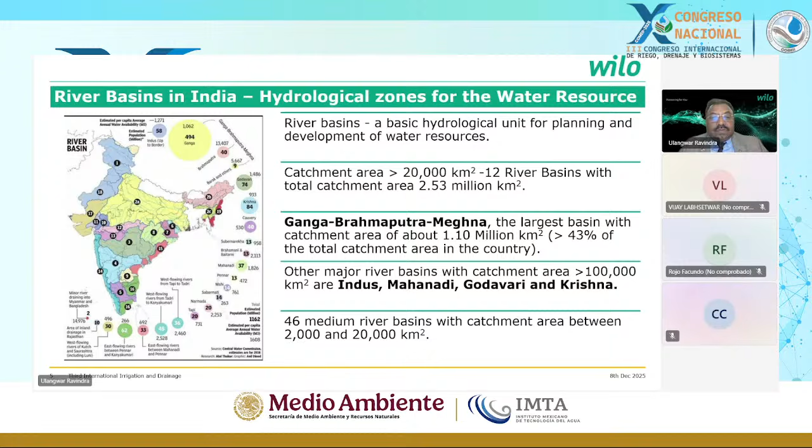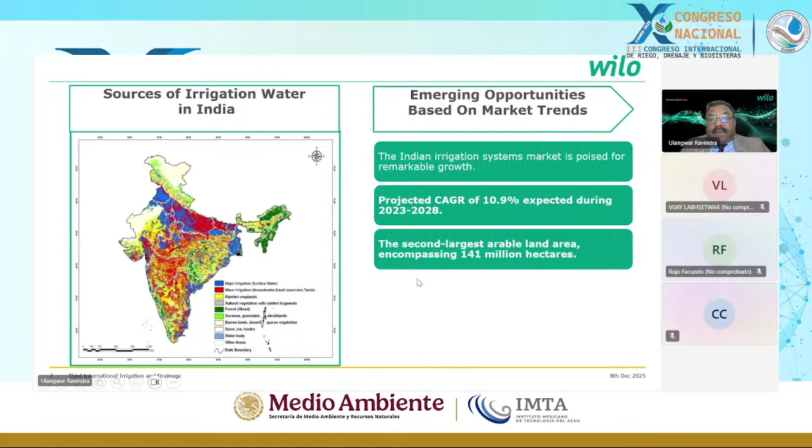But at the same time, there are a lot of emerging opportunities in India based on the recent trend. The Indian irrigation system market is poised for remarkable growth because we have 1.4 billion people to feed. At the same time, the Indian economy is totally based on agriculture. We are an agro economy, mainly similar to Mexico.

The projected CAGR, the compounded annual growth rate, is close to 11% during the period 2023 to 2028. India has one of the second largest arable land areas, encompassing 141 million hectares, and out of which the irrigated crop area is almost 50%, which is 71 million hectares.

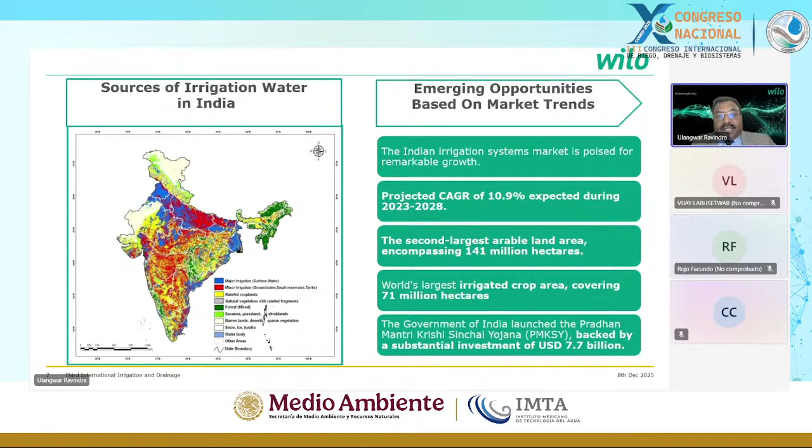In India, the irrigation sector is governed by many government policies from the federal government as well as from the state government. There are many programs driving this irrigation sector, with all the funds and finance coming from the government. So all the big programs currently implemented in India are backed by government funding. There is one program, a Prime Minister program, worth US $7.7 billion, one of the flagship programs of the present government. So there is a huge push from the government to develop the irrigation infrastructure in the country.

In India, we divide irrigation projects into small irrigation - any project less than 500 hectares is called small irrigation. Medium irrigation projects are between 500 hectares to 2,000 hectares, and major irrigation projects are close to 10,000 hectares - any project more than 10,000 hectares is called a major irrigation project. Most projects are classified as small, medium, or major based on the command area, which is defined in hectares.

Recently in the country we have a trend, and also a government policy, which we call a pressurized distribution network. During the opening session we mentioned that in Mexico also there are a lot of canal-based projects. Similarly, now the pressurized distribution network takes water from the resource to the root of the crop or to the boundary of the farmland through a network of pipelines. This is pressurized water because there is a pumping system, and through pumping we develop enough pressure at the farm boundary, and this is also called ready for micro irrigation.

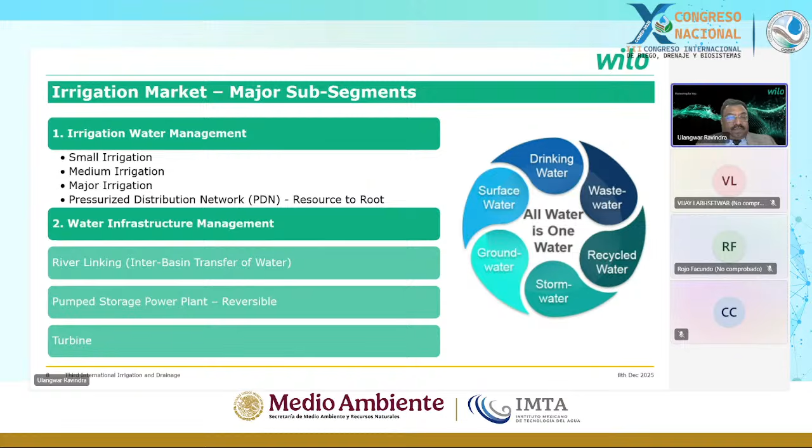We have two sources, groundwater based - normally these are open wells and also bore wells. I think it's a similar situation in Mexico also, because groundwater is being overexploited and the water level is speedily decreasing, so we need higher capacity pumps to draw the water from this bore well from the depth of the earth.

We have surface water based sources - mainly all the big projects which we call community irrigation projects are based on surface water, and the source of this water is either lakes, dams, canals, or rivers. So India during the last 75 years has built many dams, and almost all the potential where we can build a dam has been harnessed by the central federal government.

Mainly this is a state government subject. All the states have developed dams, and these dams are the primary source of irrigation and also for drinking water for communities in the rural part of the country.

This dam also has its own canal network. At the same time, many rivers are perennial rivers, large rivers which we saw in the beginning in the river basin. These perennial rivers flow all 12 months and are also a source of irrigation, because many large projects are built on rivers. One of the case studies I am going to present is also a river-based, large community-based project.

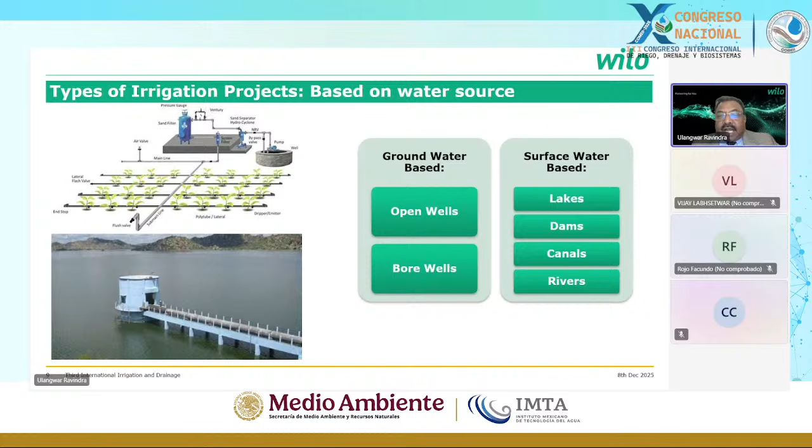In surface water, there are two types. Initially, when India became independent, we started with gravity irrigation. And once the gravity irrigation covered the entire command area, the second phase came with lift irrigation.

In the picture, you can see in a large river they have built a pump house with a battery of pumps installed. These pumps lift water from the river, and you can see the rising main, the pipeline. They lift water and take it to a higher elevation where the command area is, which normally cannot be served by gravity. So you need to lift the water from one level to another, with a series of pumping, sometimes single stage, sometimes two stage.

This is a project I was also involved in, one of the big projects in central India, on the river called Krishna. One of the largest pump houses, when it was constructed 20 years back, was one of the largest pump houses in Asia, I would say. So we have either single-stage pumping or multi-stage pumping.

We call it series pumping. If the command area is at a very high elevation, we take water from one pumping station to pumping station 2, then 3 and 4. Depending on how the command area is distributed at different levels, water is transferred from one place to another with the help of pumps in large pumping stations.

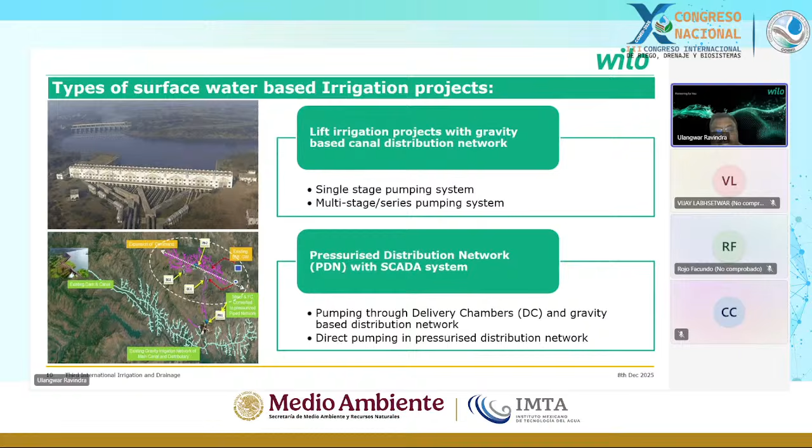Just to give you an idea how big the Indian market is: we have 141 million hectares of net cultivatable area, out of which the irrigated area is 71 million hectares. Mexico has 6.5 million hectares of irrigated land, as far as I know. So we are 10 times bigger than Mexico as far as net irrigated area is concerned.

And again, it is distributed by groundwater. So almost 43 million hectare is groundwater, and only 28% is covered under micro irrigation. Out of 43 million hectare, 12 million hectare is covered under micro irrigation, and surface water is 28 million hectare, and the micro irrigation coverage is very minimal. Actually, it is negligible because this big groundwater based schemes are all government finance, whereas surface

water is now just starting in a big way. So slowly farmers, once the water is available at a farm boundary, will adopt sprinkler or drip irrigation.

So we have the program called 'per drop more crop.' That is the motto or tagline of the government program, where they want to harness every drop to generate or grow more crop. So it is called more per drop, more crop.

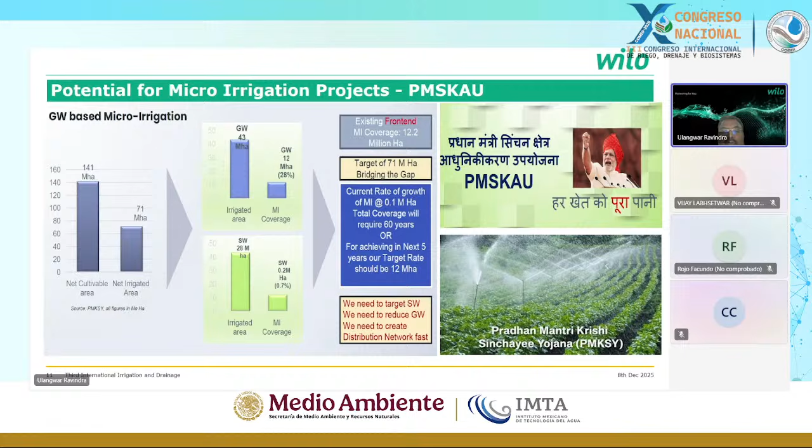Now, as I mentioned, India is shifting from a canal-based system to the pipe-based system, which according to me is a big revolution in improving water efficiency, which all of you as irrigation engineers also agree, because here there's no wastage of water.

And the biggest problem in India is if you have to put the canal, we have to acquire the land from the farmer, which is on a permanent basis, and which is a big painful process, and it takes a long time to get the land from the farmer to lay the canal.

And this is one of the reasons many irrigation schemes were not so effective, because they could not develop the complete canal network covering the whole command area. There were some gaps, and the water could not reach the tail end. So the farmers at the tail end were suffering.

That is why now, as per government policy, any irrigation project in India has to be through pipe network. We cannot have a new project with a canal.

There are many advantages through pipe: no wastage of water, no theft, no evaporation, and there is equitable distribution because every farmer up to the tail end can get water, better control and management, no contamination. You can open it as per the irrigation calendar. There's no maintenance - canal has huge maintenance and silting issues.

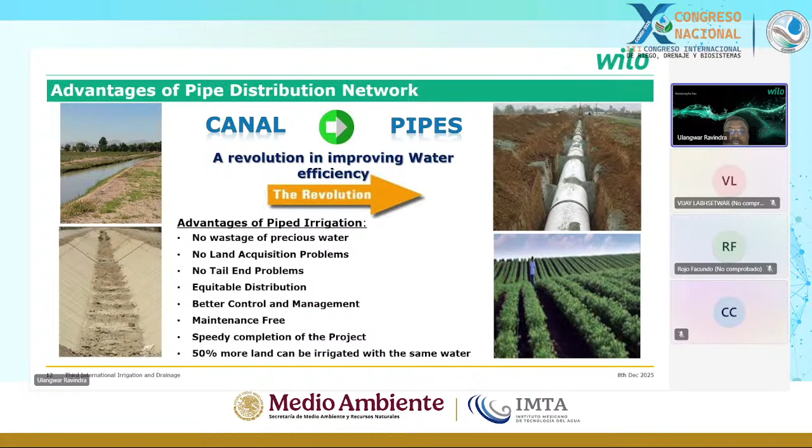So this is now government policy in India - all projects should be with pipe irrigation.

Okay, I think I'll run a little bit fast. Smart - so we call it, when it is pipe irrigation, it is smart irrigation because those are with a pumping and a SCADA system.

So we know the benefit of smart irrigation, you all are experts, so you know. But just to touch upon, basically, it is helping farmers to generate more income because of higher water use efficiency and agriculture productivity.

The yield of the crop has gone up very substantially, which is generating substantial employment in rural areas. Earlier, many people from rural areas used to take one crop during the rainy season, and later they used to migrate to big cities for earning money, because there is no water after the rain, so they don't have any work, so they go to the city, and then the city becomes crowded, with a lot of urbanization and associated problems.

So because now water is available in the farm for the second and third season, there is reverse migration - we call it reverse migration. Now these people from rural areas are not going to cities, and they are busy with their own farm, which is bringing a lot of social benefit, bringing happiness - community and family life has gone up, a lot of social issues are resolved.

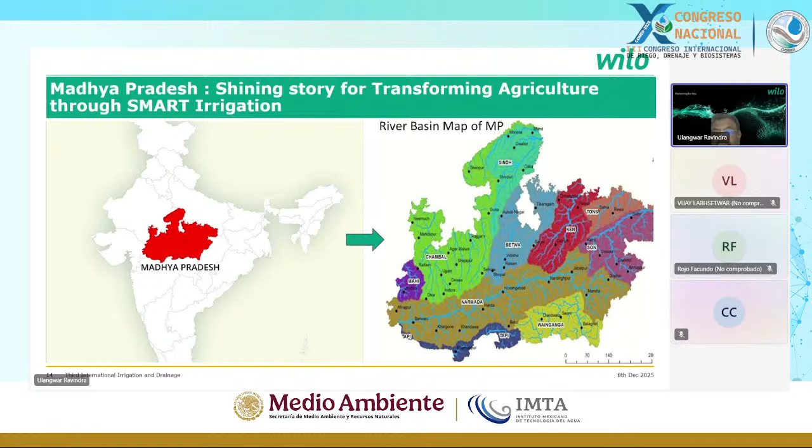So far, the government did not do anything, but suddenly they realized if they don't use the water, they will lose their control or rights on it. So they came out with many projects, but the problem is this river flows at a very low elevation, while all the command area is at a higher elevation. So to use this water, they have to put big pumping stations to lift the water from the river and take it to the higher elevation.

Because of all this investment in irrigation projects by the state government, you can see the progress in agriculture development. We call it transforming agriculture through irrigation. The state's GDP was growing at 4.5%, and now they are growing at 16.5%, one of the highest in the country. This state has the highest growth area, driven not by industry, but by agriculture.

Agriculture growth was merely 0.3%, negligible in 2003. After 20 years, it is now 19%, very impressive. Per capita income has increased more than 10 times, from $125 to $1,600. Irrigation command area has increased from 0.7 million hectares to 4.5 million, growing very fast because of various schemes.

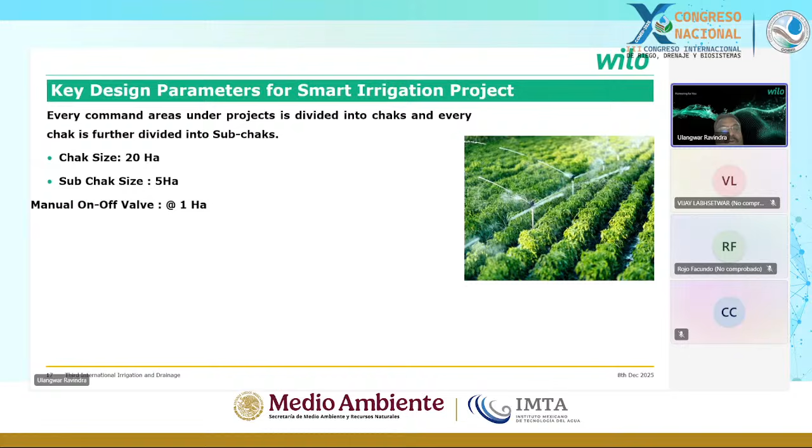I'll quickly take you through how these projects are designed. This is the interesting part. Every command area under a project is divided into a 'chak,' which is a unit normally 20 hectares in size. They combine the farms of every farmer to make this 20 hectare unit, called a chak in the local language. This is further subdivided into 4 zones, each zone being like a sub-chak of 5 hectares.

At a manual on-off valve, they put it at 1 hectare. So 20 hectares is divided into 4 zones of 5 hectares each, and every 5 hectares is divided into 5 outlets of 1 hectare.

The project is designed so that 20-meter pressure is available at the 1 hectare outlet, which is normally the farm outlet. Depending on soil condition, weather, and crop type, we call it a kharif crop, but normally it is wheat. This area is very popular for high quality wheat production.

The crop water requirement, or irrigation duty, is 0.33 liter per second, varying from 0.33 to 0.35 depending on which zone the project is located in the state. The complete pipeline is designed to deliver 10 times the irrigation duty, so when sizing the diameter, we take 10 times the duty. The pipeline is designed for 3.5 LPS per hectare.

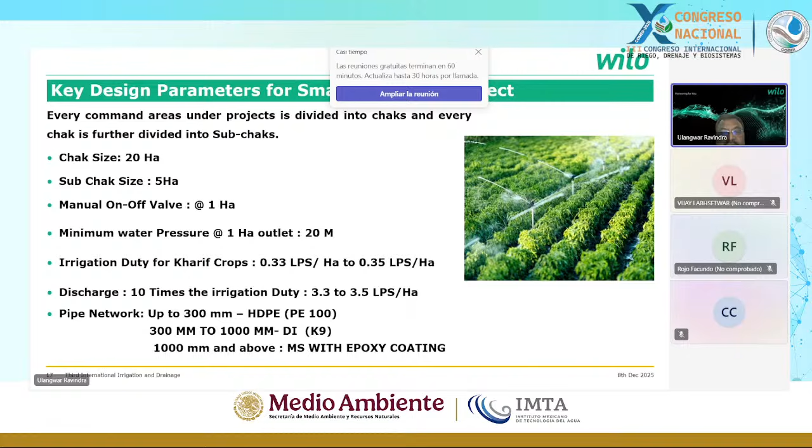All this pipeline is underground, and up to 300 mm diameter we use HDPE pipe, high density polyethylene, grade PE100. From 300 mm to 1000 mm we use ductile iron, K9 grade pressure grade. Above 1000 mm we use steel pipe with epoxy coating, which is food grade quality.

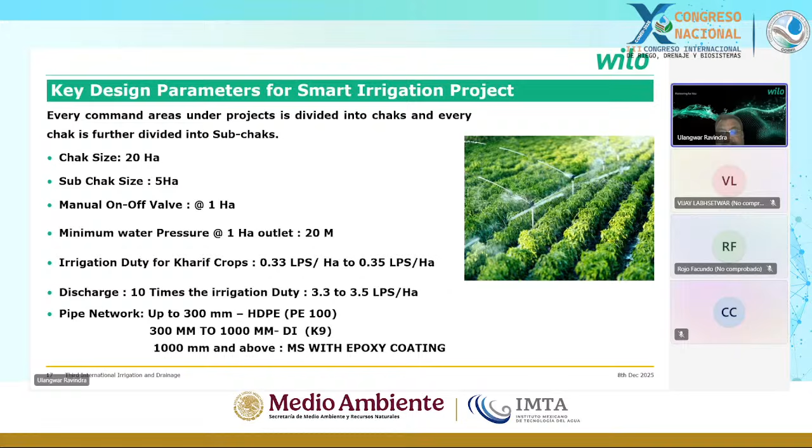This is how the distribution network works, as I told you. Suppose this is the river. From the river the water is taken, and this is the complete pipeline, the hydraulic network of the command area where we want to take the water.

For every project, government declares the command area, say 10,000 hectares or 20,000 hectares. We are working today on one project whose command area is 100,000 hectares, so you can understand how big the scheme is. Normally it's divided into many villages, and depending on the village we have the farm record, land record, which is the basis for designing this project.

Depending on the topography and elevation difference, the pipeline is designed using various hydraulic software like WaterGEMS or Autodesk, among many popular software in India. All this software is used for deciding the routing of the pipeline, the sizing and diameter, and how to reach every farm up to 1 hectare.

It's like a telescopic network of pipeline, bigger diameter at first, and as you go further away it goes on reducing, until at the last point it's normally 60 mm. Sometimes it's 3000 mm from the beginning, and at the tail end it goes down to 60 mm or 90 mm, depending on the total flow.

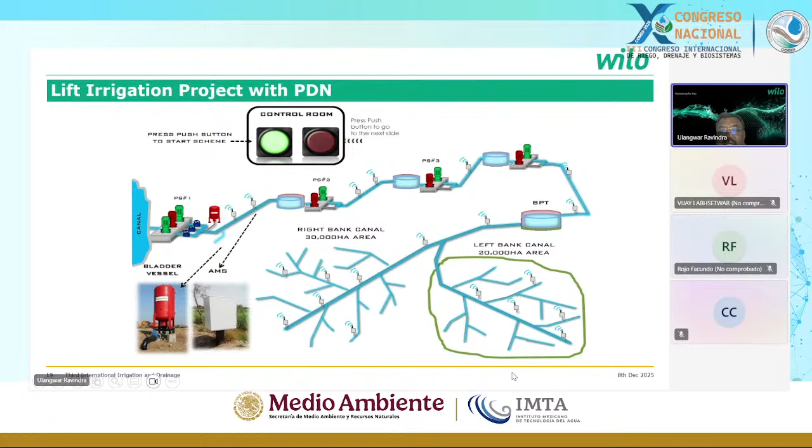This is also shown schematically. We have a pumping station at the beginning, then pipeline, and on the pipeline we have an air management system, because this pipeline is underground and needs proper venting. So air release valves, control valves, and isolation valves are provided.

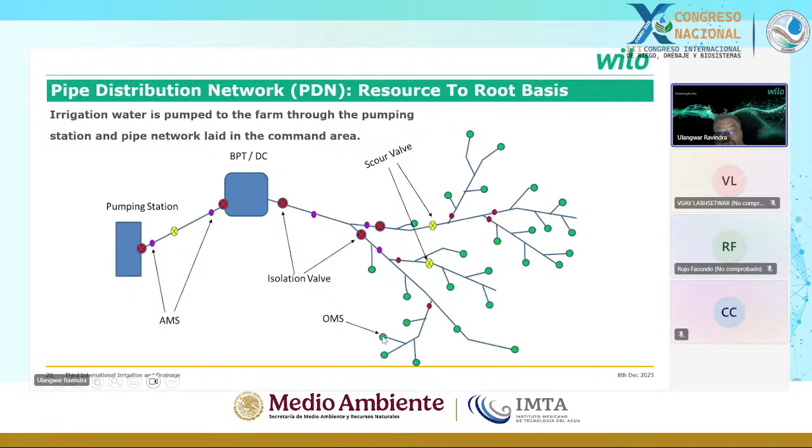At the end, at the 20 hectare point, there is the outlet management system, where the control valves are placed. Let me take you quickly through the control valve.

This is the control valve. This control valve is actually operated through hydraulic pressure of the pipeline, and there is solenoid operation, and we use solar energy for operation of solenoid valves.

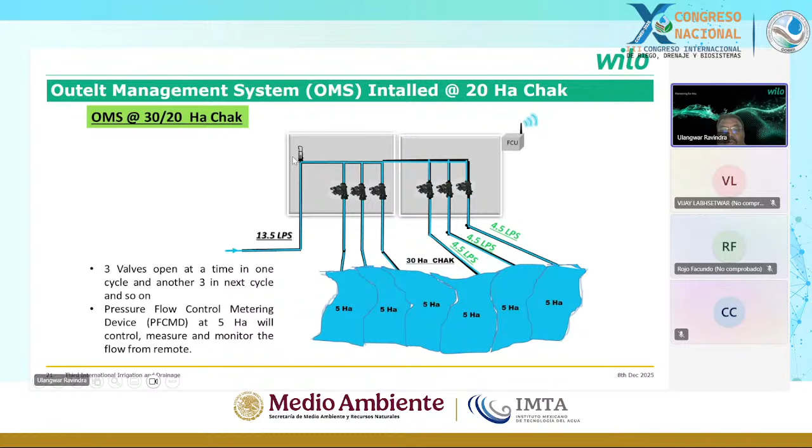So no pipeline is seen above the ground, everything is underground. Every time three valves are open as per the irrigation calendar or scheduling, and after this cycle is over, another three valves will get open. These are radio connected, so the valve can be operated remotely from a control station, mobile, or laptop anywhere in the world. There is a wireless communication system, very advanced, so every valve, every farm can be controlled remotely using the radio link.

So this is what it looks like. In the actual picture, you can see this water is coming from the ground, and there is an air valve and an isolation valve. Here there is again a filtration system. Because we want to use the water for sprinkler, it should be clean water, so we filter the water with 200 micron.

Here you can see the valves, and this is the box in which all the control circuit is mounted. There is a battery, and this battery is operated through a solar panel. So you don't need any electricity, and the valve also operates through the line pressure. So you don't require any electricity. It is an electricity-less and wireless system.

There is a web SCADA system, so that in a central control room in the pump house, all these kinds of boxes are connected, and you can run the program irrigation schedule depending on what is the crop and what is the season. The complete program can be fed into the computer, and the whole system will work automatically. The farmer will get a notification on his mobile whenever his turn comes; 10 minutes before the water is going to start, he gets an SMS on his mobile that his valve water is going to come.

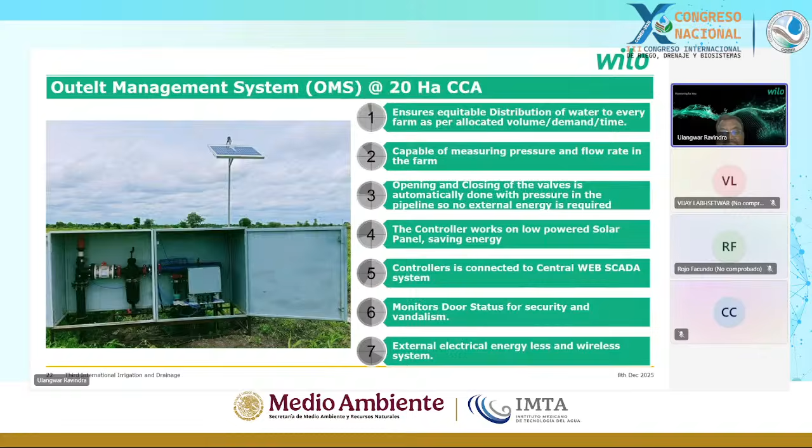So this is how the SCADA screen will look, where you can see the incoming pressure, the delta P, the outlet pressure. Valve open is green, valve close is red. You know which farm, where it is going, his mobile number, what is the area of a chak, and then all the position, how much valve is open, how much valve is closed, what is the water going, how much total volume delivered today. Everything is available at a quick click of a button.

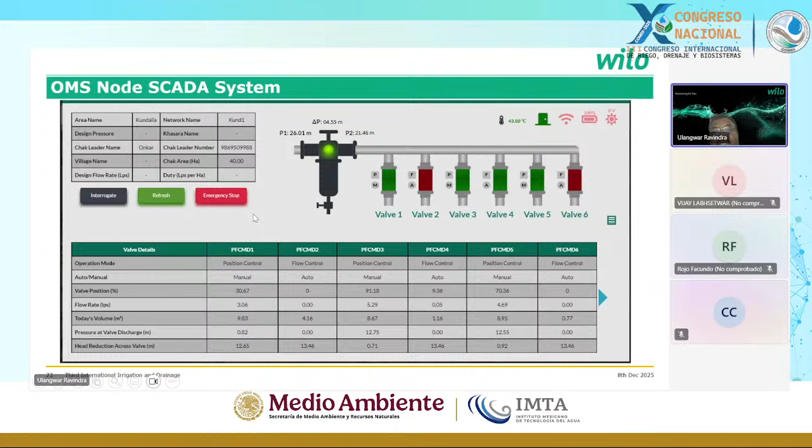So you can access this anywhere. You know the temperature, the battery life, the sunlight - everything is monitored remotely, how is the network. This is a very advanced SCADA system which monitors every node, which is installed at 20 hectares.

This is a central control station which has all the pumping system and SCADA system. You can operate the number of pumps depending on the water level and the complete irrigation demand in the command area. You can decide how many pumps to be operated. Then there is a VFD, so we can operate higher flow or lower flow. Also, the power is calculated, so energy efficiency is also taken into consideration. Every pumping station has very advanced instrumentation and control to operate a big pump.

These are very big pumps, 3 megawatt, 4 megawatt each. Normally each project consumes 50 to 60 megawatt of energy, so we have to be very mindful how we use less energy to pump more water.

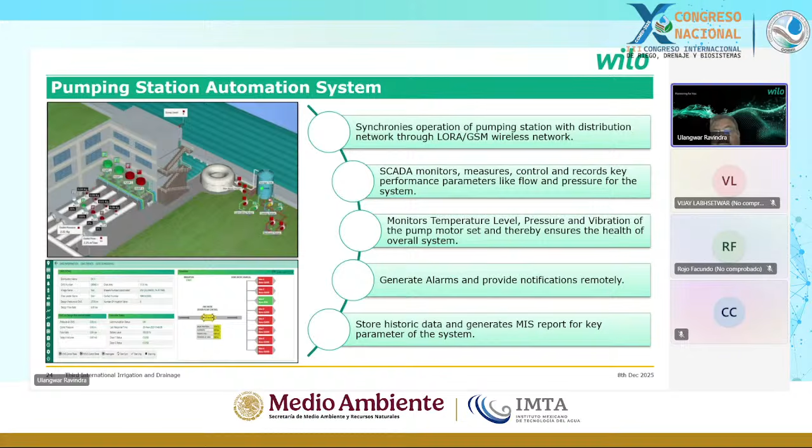So this is how we do the gateway. There is a radio, wireless radio network, covering the complete command area. We install towers like this - these are the wireless radio towers which control all such OMS installed in the nearby area. Depending on the topography, the height of the tower and the location of the tower, we decide. And there is a LoRaWAN.

These are different technologies. Sometimes we use GPRS, which is a mobile network; sometimes we use LoRaWAN, which is another wireless radio technology. All these towers are talking to the remote server, which can be anywhere in the world, and then it gets connected to the control room. So sitting in the control room, you can give a command to any outlet to close the valve, open the valve, based on what is the demand for water. If there is rainfall, we can close all the valves.

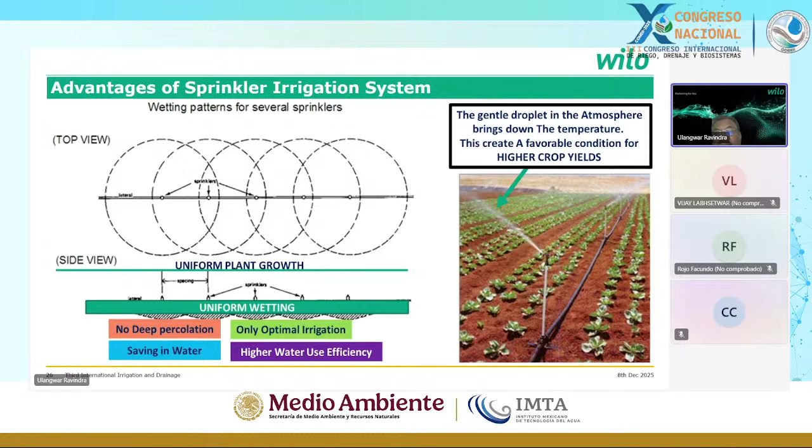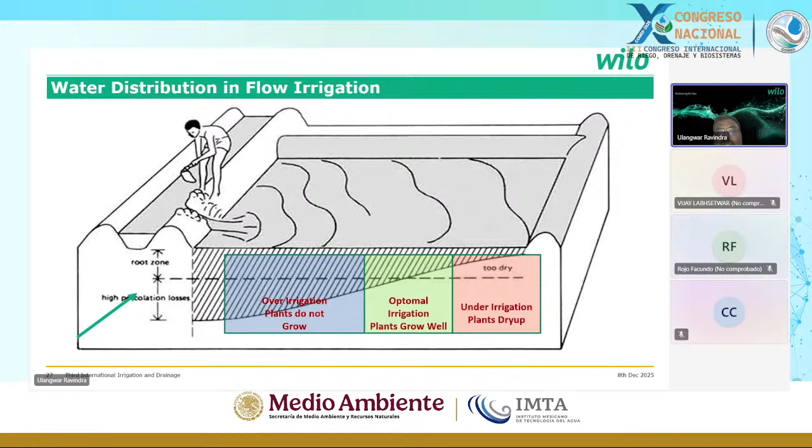Okay, I think you are more expert on this, so I will not talk more on the sprinkler irrigation. There are a lot of advantages of sprinkler irrigation because the field is evenly wetted, so uniform plant growth is possible. This is the earlier system of flow irrigation - I think I will not touch on that because you are all experts.

Okay, I will quickly take you through one of the projects. This is the Nagalwadi project. I think I'll finish in 5 minutes.

Here, the same Narmada River. This project is lifting 54,000 meter cube per hour. Total pipeline length is 60 kilometers. From here, water is lifted and we are bringing water to here. So this is 60 kilometers long. Total height is 293 meters. The total project cost is 110 million USD and 106 villages are getting benefited.

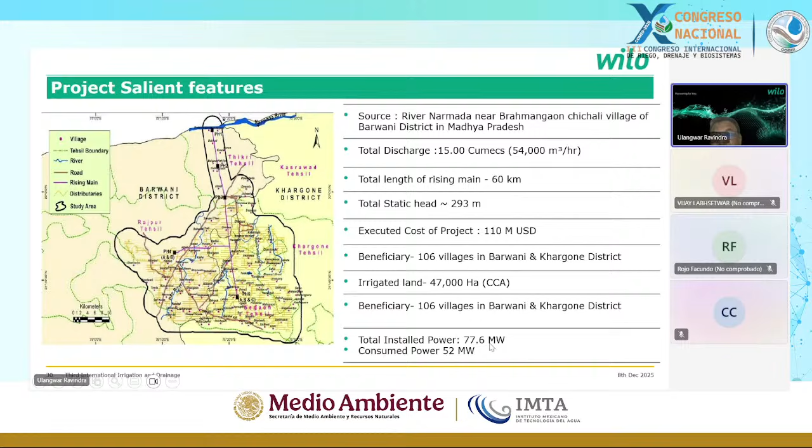Total command area is 47,000 and total power is almost 78 megawatt, and we are consuming 52 megawatt to run the pumps. So this is how the water is coming from the river, and the command area is at a different elevation. So what we are doing is taking water from pumping station 1 to 2, 2 to 3. Station 3 is feeding water to this command area.

Balance water is going to pumping station 4. From station 4, there is another command area which is fed at 10,000 hectares. There is another command area of 5,000 hectares. The balance water goes to pumping station 5, which feeds another command area. Similarly, we are lifting water through 7 pumping stations, and along the length we are feeding water to the command areas alongside the pipeline.

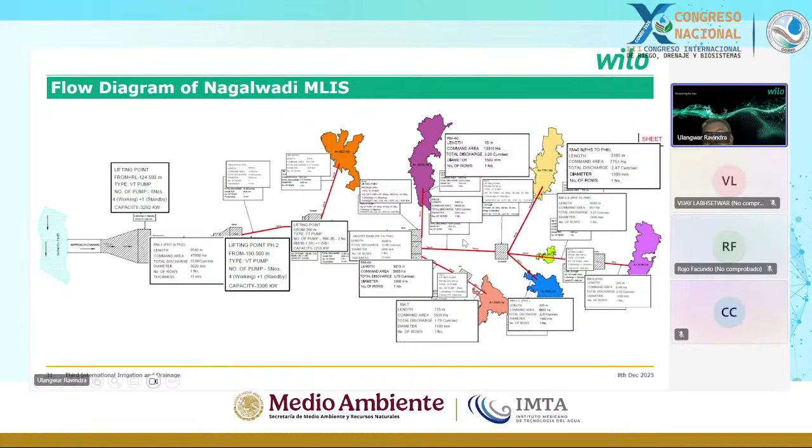Below is my company, where I work. We are a joint venture involved in this project with one of the large civil construction companies, who was responsible for construction civil work and laying the pipeline. We did all the automation, all the pumping system, and all the electrical work for this project, and we supplied 36 large pumps. Each pump is 3 megawatt.

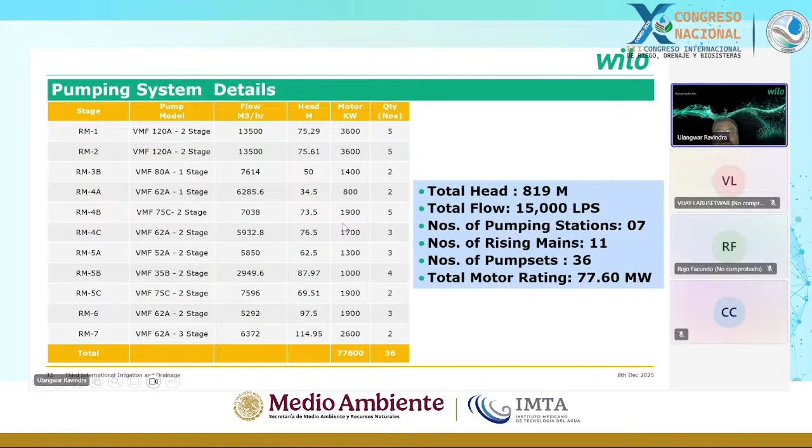This project is very successful. You can see we supplied 36 pumps. Total head is, we are lifting water by 819 meters, 15,000 liters per second. There are 7 pumping stations, 11 rising mains, 36 pumps, and total power is 77 megawatt. You can see different pumps, each pump is 3.6 megawatt. Huge machines. Okay, these are just photographs to give you an idea.

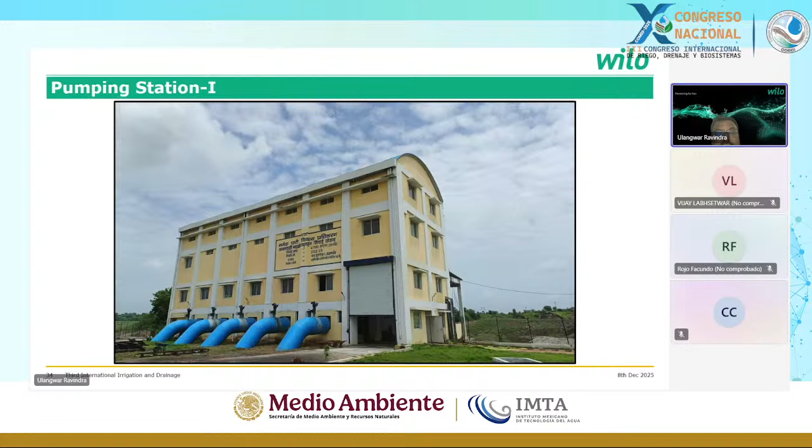Pumping station 1, which is lifting water from the river, which is on the other side, back side. This is from the delivery side. Inside there are pumps, and you can see there are 5 pumps, 4 working and 1 standby, which is lifting water and putting it to pumping station 2. These are the big pumps. You can see a large motor at 3 megawatt inside the pump house.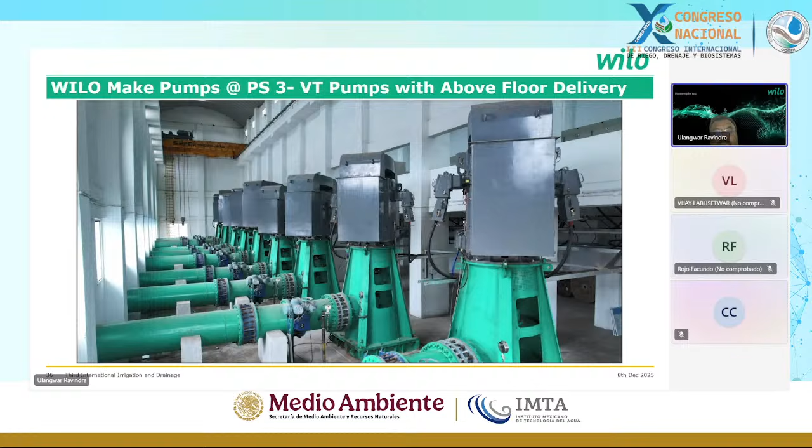This is another battery of pumps in pumping station 3. This is how the pumping station looks, where we are taking water. Here you can see this is only an intermediate pumping station, so you have to manage. This is the only storage of water, so we have to synchronize the operation of pumping station 1 and 2. Otherwise, if there is uneven operation, the flow rate is not balanced, water will spill over, or the pump will not get enough water. So we have to very carefully plan and control the number of pumps so that the same water coming into pumping station 1 goes to pumping station 2 and then 3.

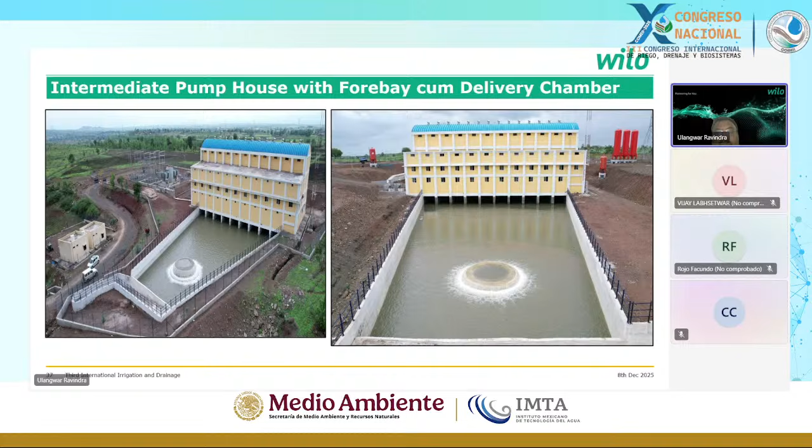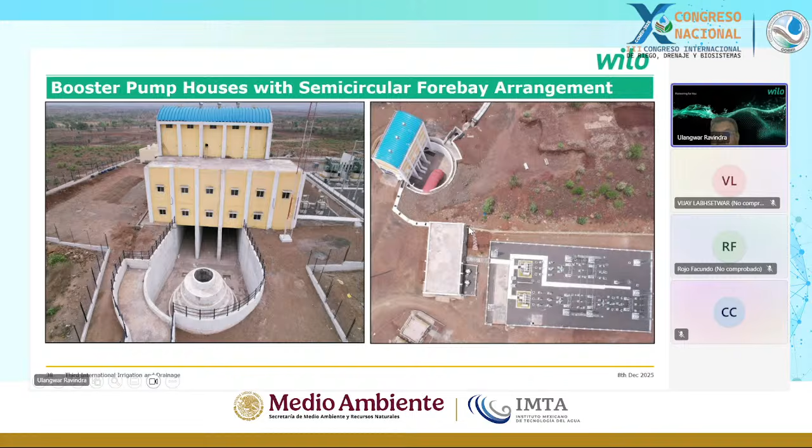This is another very different pumping station. You can see the very special semicircular forebay design. You can see this electrical control system in the same compound. We have a similar control room here. The control station is installed here, a central control station which controls all the operations of the command area.

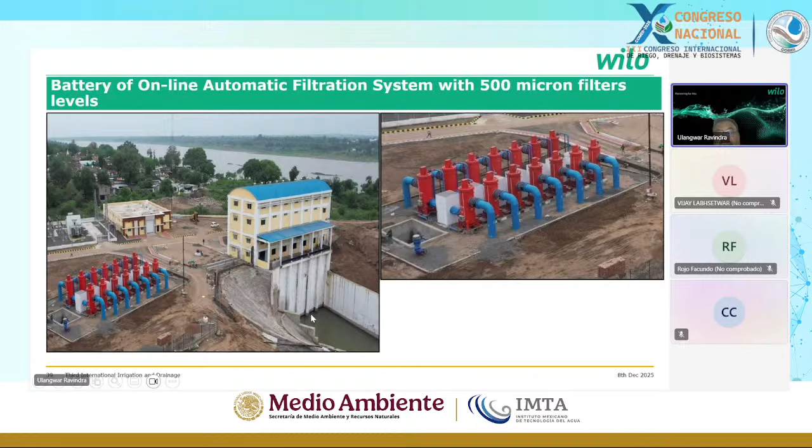As we go from monsoon to the summer season, the water level is depleting and it goes to a low level. So very long pumps are installed inside.

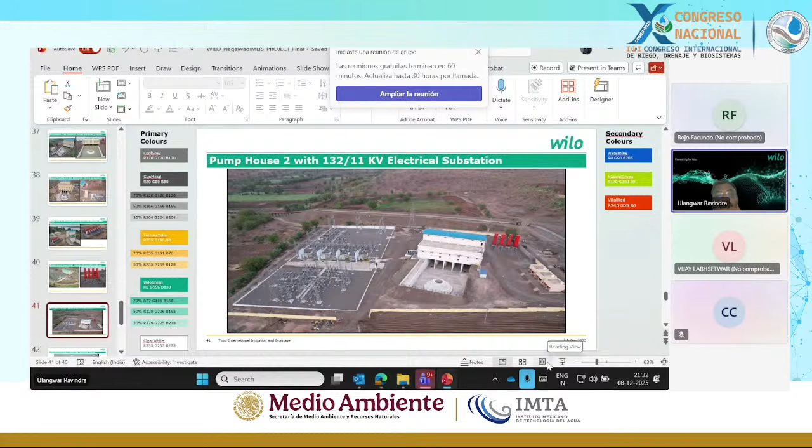We lost connection, and we are almost out of time. So, yeah, I am finishing the last slide. You have your last 5 minutes.

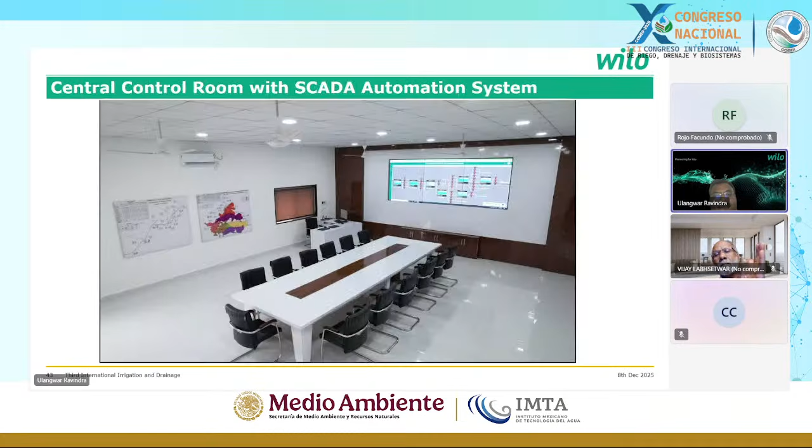Hello. Hello, yeah, hello, can you hear me? Yeah, I finished my presentation.